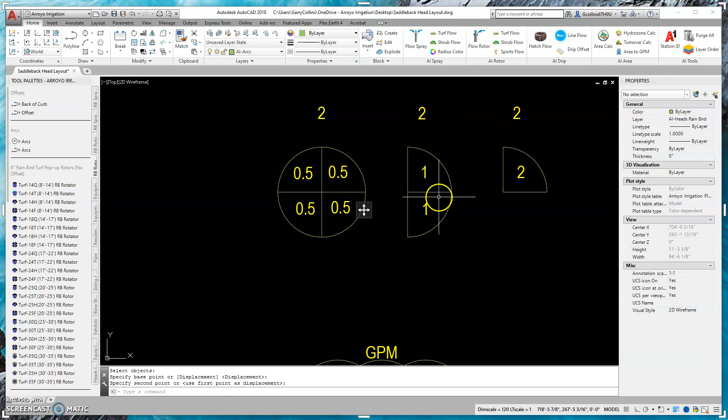And I have a good little example up here. So you take the quadrant and the total flow for your area. So total flow is 2 GPM. So in one quadrant, the quarter, you have 2 GPM. Now a half, you have 2 quarters essentially, but you only have 2 GPM. So for the total of 2 GPM, you only have 1 GPM in each quarter. And now over here in your full, you have 4 quarters that make it up, but only 2 GPM. So that's 0.5 GPM in each.

So this is how you can see that if you have all these on the same system, your quarters in this area, which is the same area as these other quarters, is going to be extra wet because this is putting down 2 gallons, where this is only putting out 0.5 gallons. So there's a significant difference that adds up between 0.5 gallon, 1 gallon, and 2 gallons in the same area.

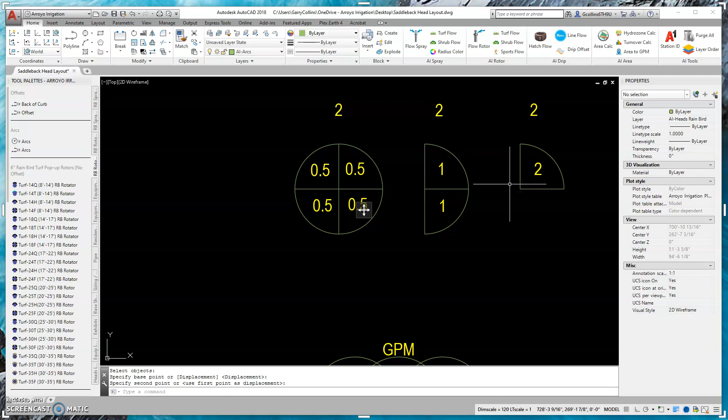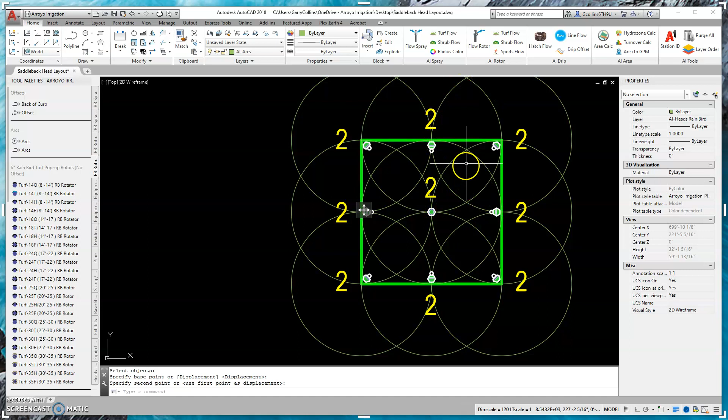So the only way in this system, if we all use 2 GPM, to make this a matched precipitation rate is we'd have to use 3 different valves. We'd put piping to just the quarters and put that on its own valve. Then we come to the halves, the 4 halves, and put that on a separate valve. And then this single full we'd put on a separate valve.

So we'd have 3 valves, extra piping, but then we could match precipitation rate by running the quarters for, let's say, 1 minute, then we'd run the halves for 2 minutes, and then we'd double that again into running the fulls for 4 minutes. And that would then be matched precipitation rate. And we'd do that in the controller.

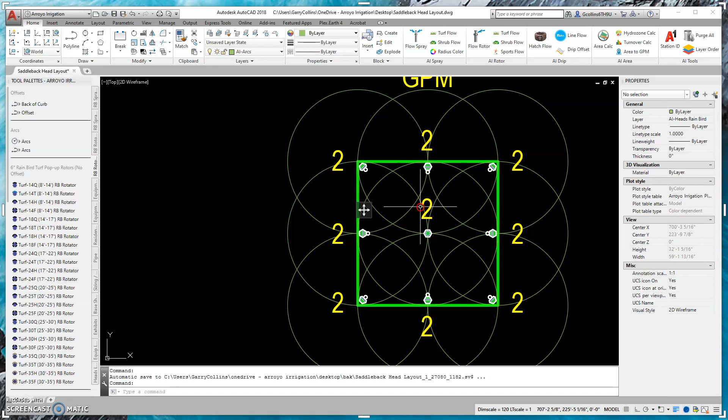So where this is still typically done is large ball fields with large rotors. They don't have matched precipitation rate, and rotors that shoot 50 to 60 feet. So that's where we would have all the same GPM in the head, and we would just put different valves for halves versus quarters and fulls. So as you can see, if we were doing this for a residence, that would eat up a lot of valves. And that's where matched precipitation rate nozzles came in, and they reduce install, labor and material cost.

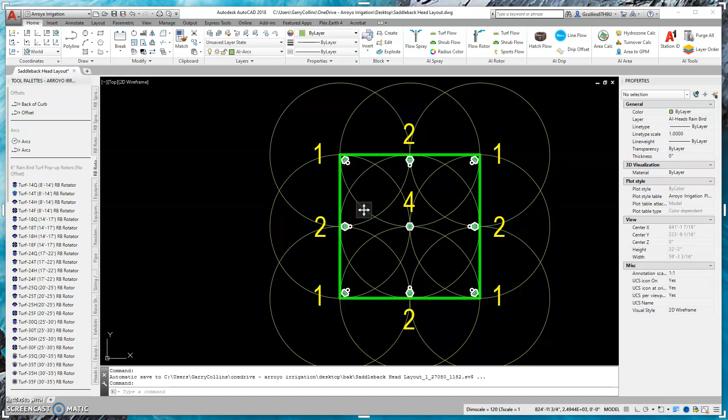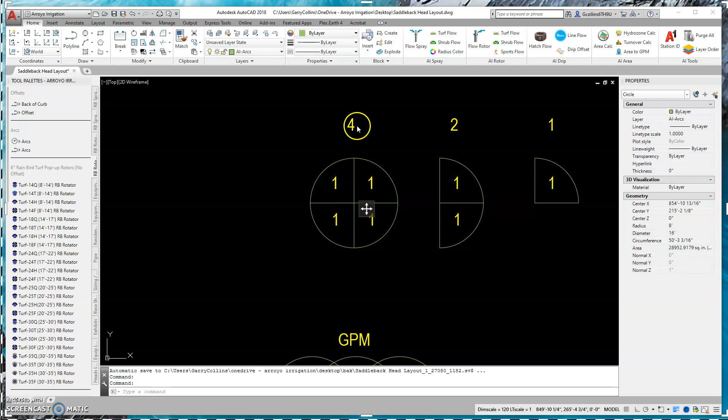Now in this example, our quarters have 1 GPM, our halves have 2 GPM, and our fulls have 4 GPM. Would this be matched precipitation rate? If you answered yes, you are correct. So as you can see, 1 GPM, you have 1 unit in the quarter, and then 2 GPM for your halves, you still have 1 GPM in each quarter, and then for your fulls, you have 4 GPM with 1 GPM in each quarter,

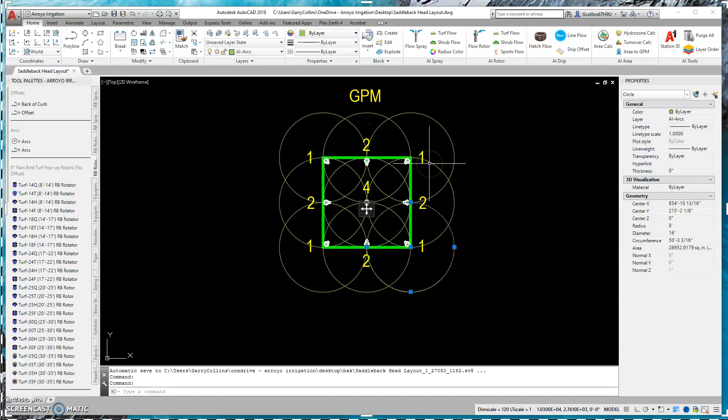which would then allow you to put this all on one valve if you had enough flow to run all heads, and they would then run the same amount of time, and you'd evenly be putting down the same amount of water.

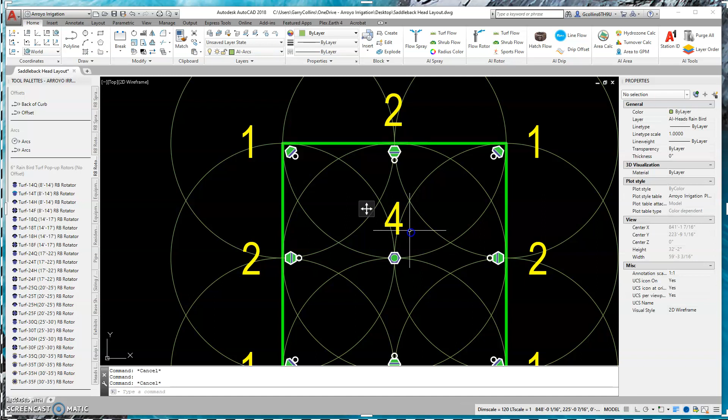And then doubling the half, it would be 1.2. This is just a little off, but just like life, nothing's ever perfect, but it's within the tolerance to call this matched precipitation rate. And so this would be pretty equal, putting the same amount of water across the entire landscape, and this is what we strive for.

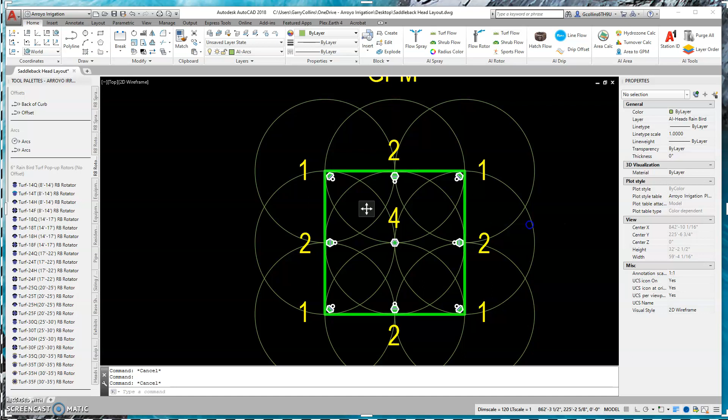So again, typically your spray nozzles and your rotator nozzles are matched precipitation rate. Some smaller rotors have specialty nozzles that are matched precipitation rate, but standard rotor nozzles and large rotor nozzles are not matched precipitation rate. And that's where you would have to valve them separately like the previous example.